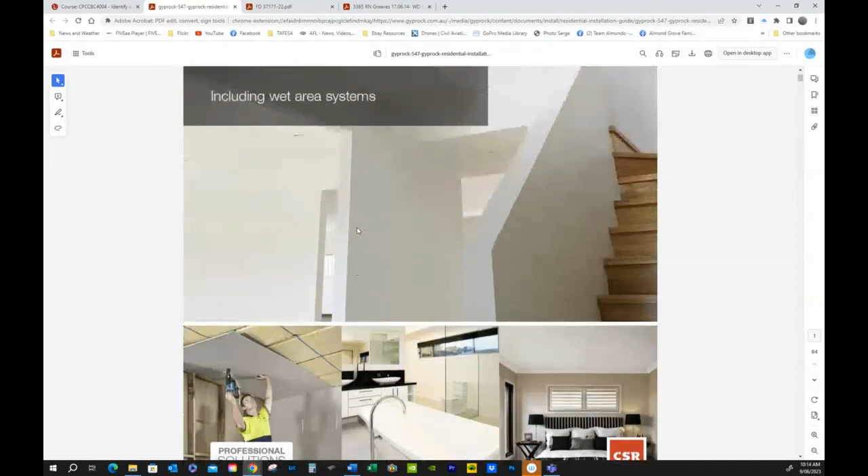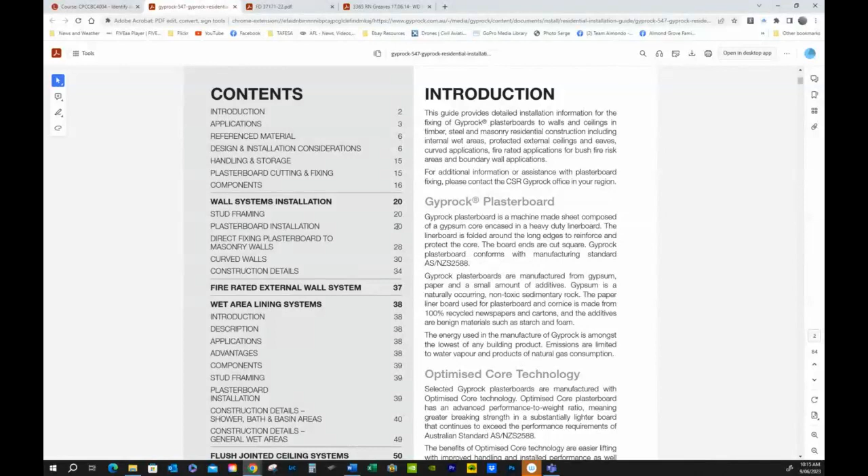of working with plasterboard. Now notice up here, it doesn't join on a sheet. It actually goes past, and then they have to back block that. And these are just lovely pictures about plasterboard. And like anything, you've got your index through here, stud framing, plasterboard installation. You've got your applications, reference material, handling and storage, cutting and fixing, components, and the main thing that I am really interested in is shower, bath, basin area, because this is critical to make sure under this wet area lining systems that all of this is actually taken care of. So I'll probably lob into here after I've actually had a look at the plasterboard installation, and I don't know if I can actually get that to link. No, so I'll have to actually go 20 pages.

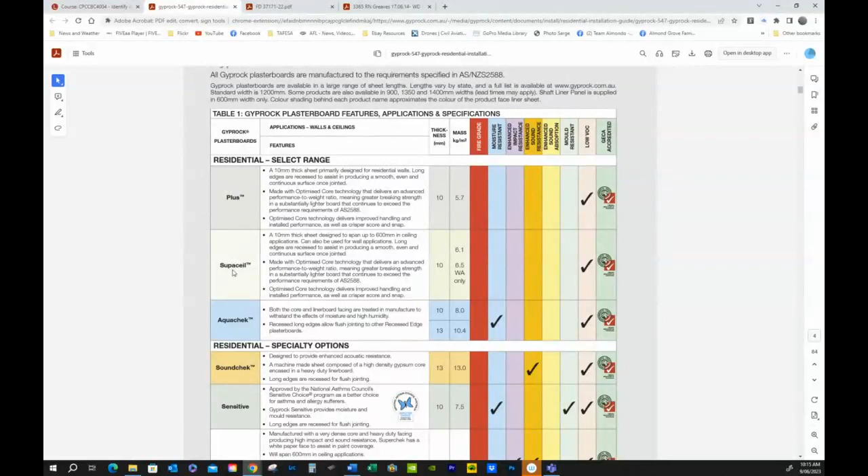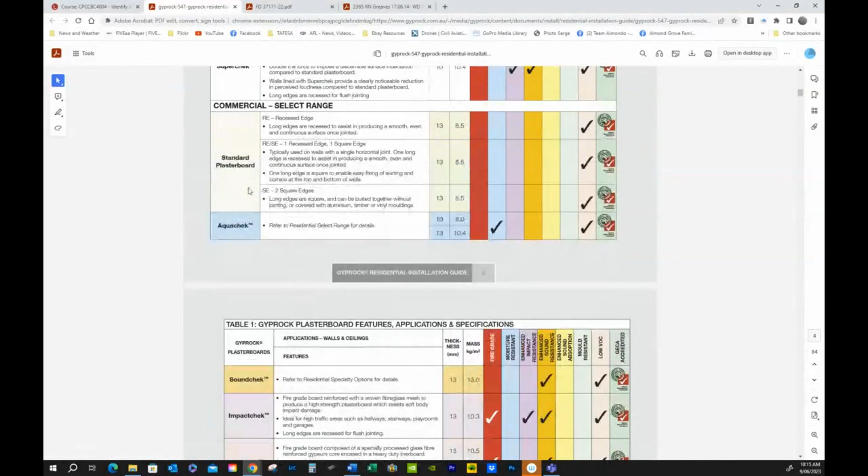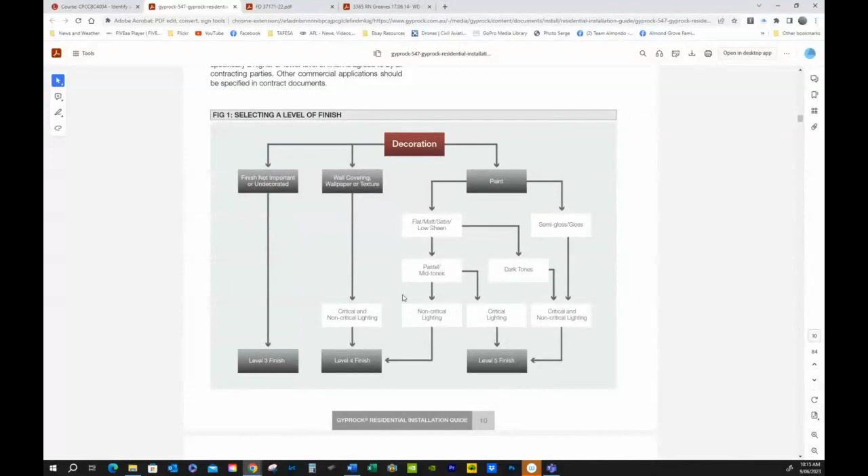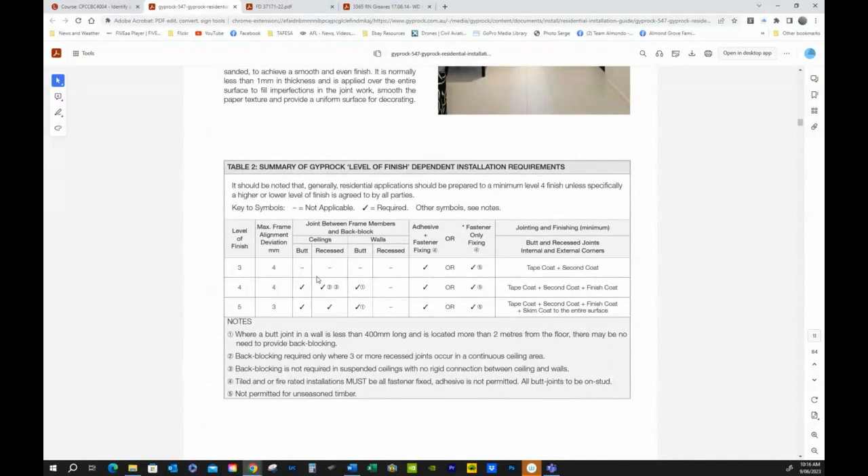Now down here are all the different applications, the different types of Supaceil, which actually has a fiberglass insert in that material to make it not sag. Aquachek is basically wet area board, and you've got Soundchek, standard plasterboard, all the different ones. And so you have access to a wealth of information, and you owe it to yourself, even if you're just doing small projects. Levels of finish, really important. How do we get just a proper finish? And it is crucial. Okay, there's the actual level of finish checklist. And so we keep on going through.

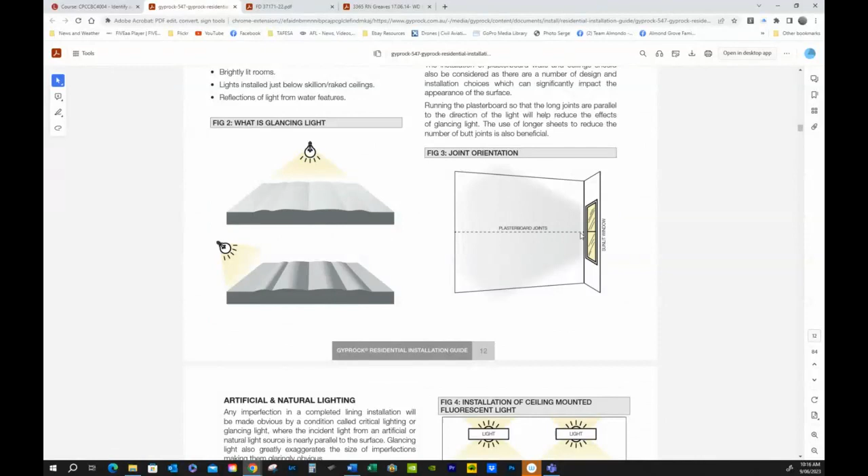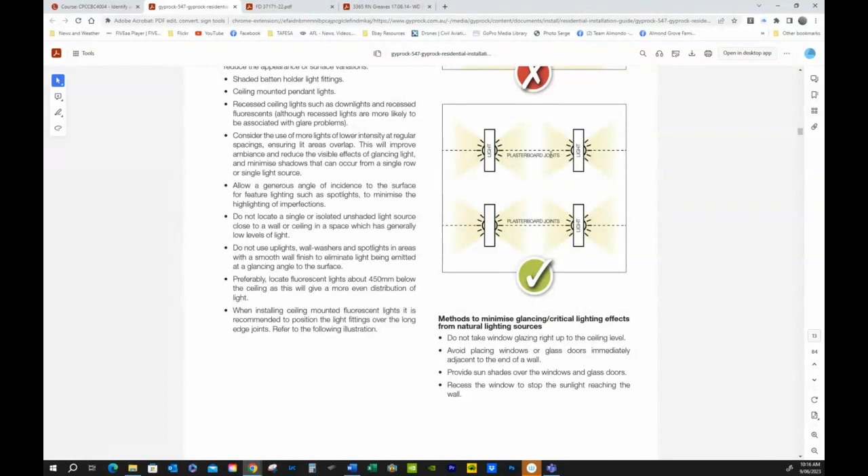This is one of the don'ts of any building. Never put a window right alongside of a wall, because the light will refract along that join and you'll see everything. Same with fluoro lights over the top of a ceiling. You will see every join. So notice this. They actually put it right at this point in the center of the lights, and because the light's so bright, no one sees it. Okay. Same inspection of plasterboard. So this is very real.

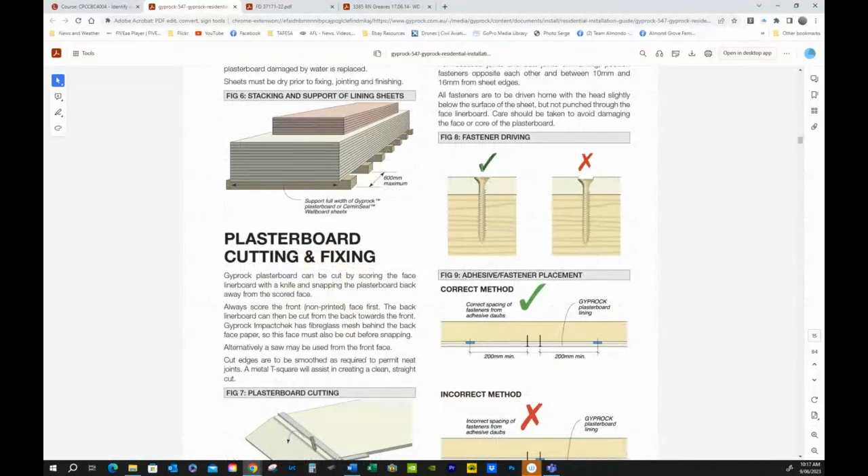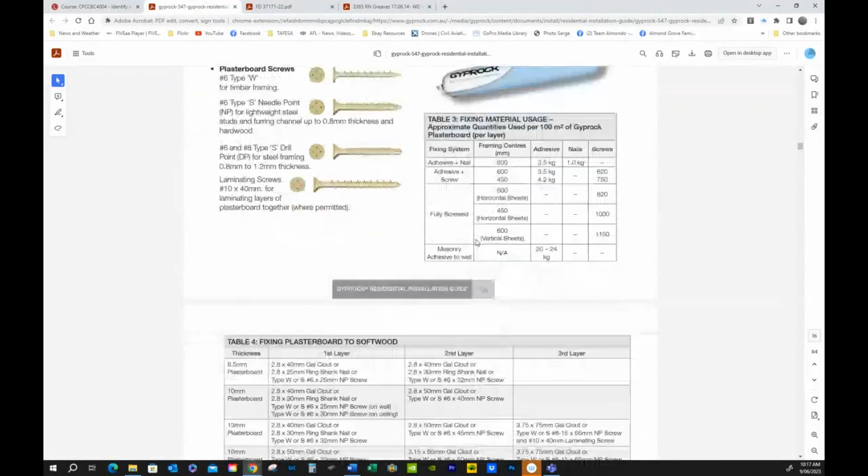All right, correct fastener driving, incorrect. These are all critical. Okay, and this is one of the problems that we actually have when we're working with plasterboard. So these are all the fixings, tells you how many screws. This is all how it's supposed to be fitted, which is really good. And it'd be great if right down the bottom we've got 18.

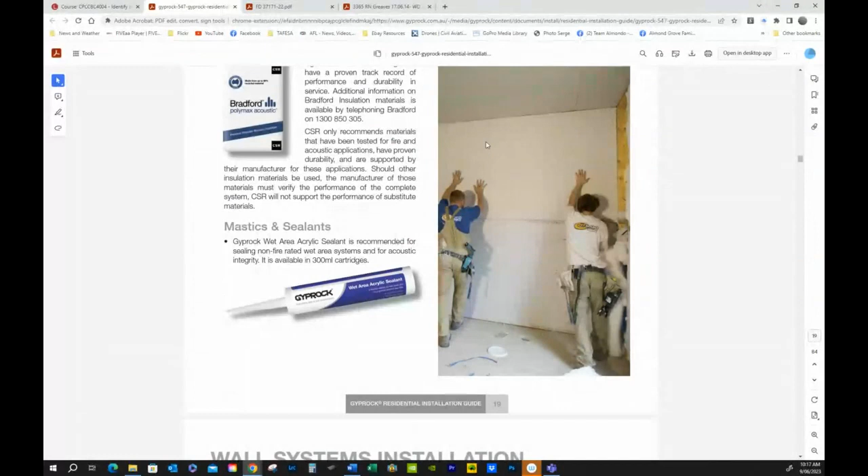Okay. Bradford Gold, we've actually got a site for that we'll be going to. And this is a list of all the products. Far too much, a little bit of a picture of a couple of plasterboard fixers actually putting their plasterboard into position, and basically they've got their screw gun here and off they go. Their hammers are not like carpenter's hammers. They actually even have like a little axe on the end, so if they have to chop out a bit of plasterboard to fit something, they will.

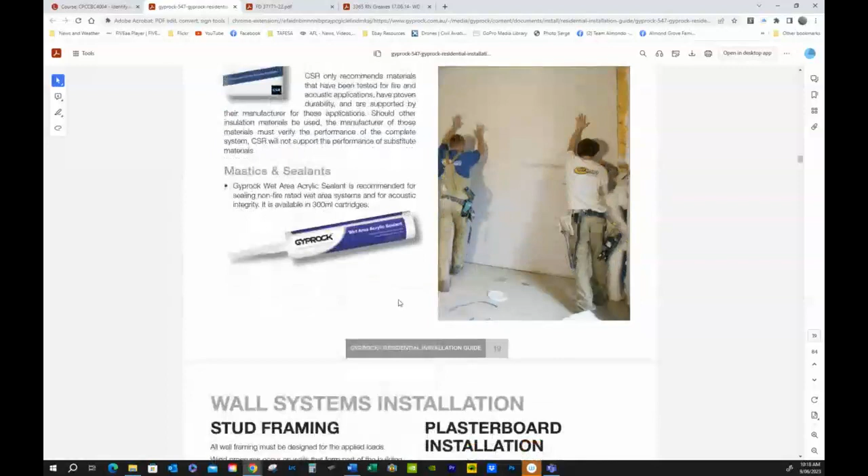So stud framing, and this is a bit that you've already seen in another video, but this is crucial. Okay, usually plasterboard is fitted across the joists, and imagine studs behind that vertical across the studs. Okay, now if you're looking at demountable partitioning, it's the opposite. They often do things vertically. This is with steel stud, and you'll notice that there's never a join here,

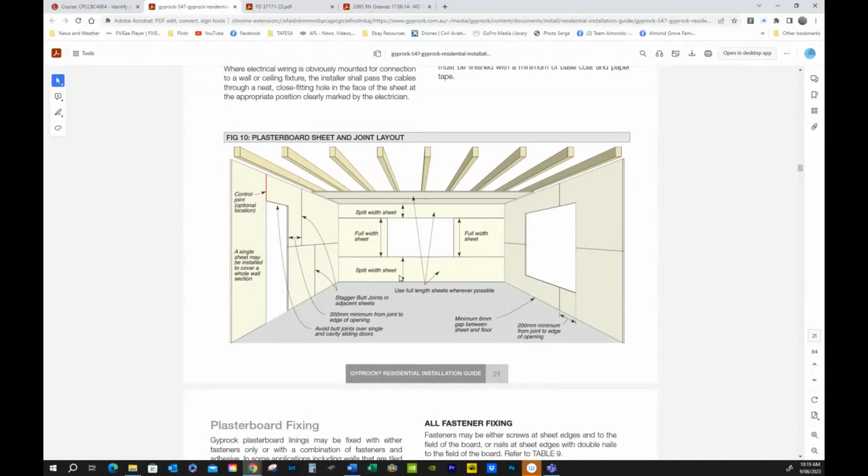or if there is, it's as ugly as anything. Generally on a transportable, you might have that, because the simple fact is they chuck a whole house on top of a semi and flog off down the road at 50, 60 k's an hour, and the road, there's movement and everything like that. Chances are you might get a split here. But these are the keys that we actually need to look at, and you can see through just some details of all the different types of plasterboard.

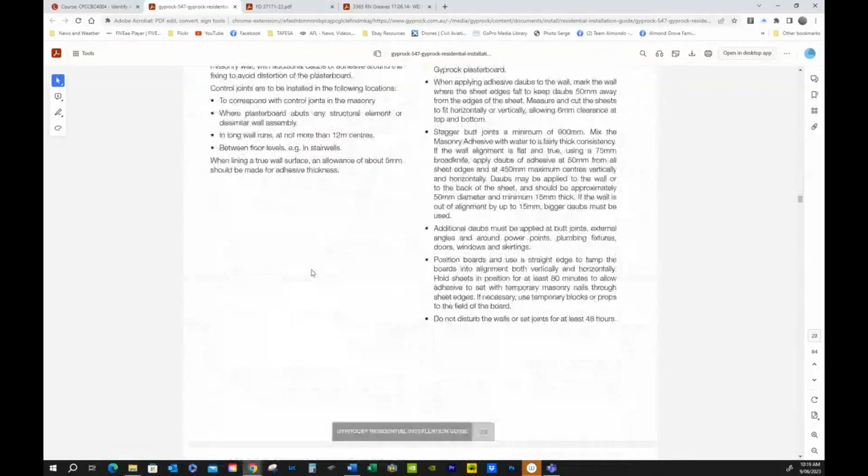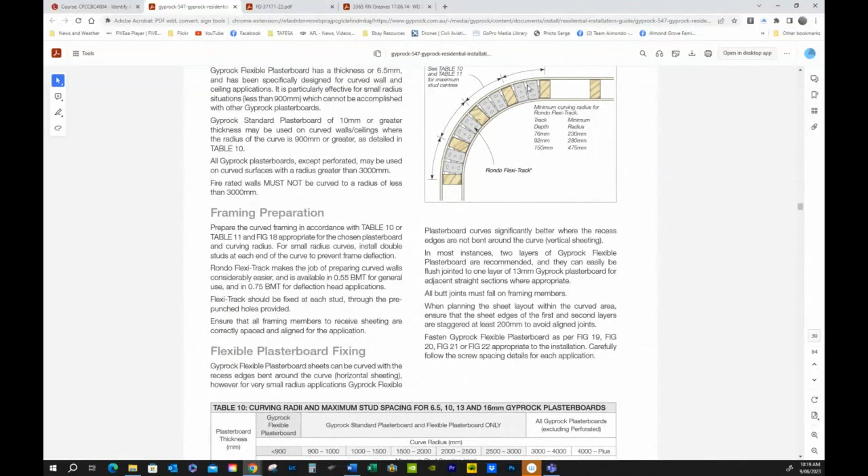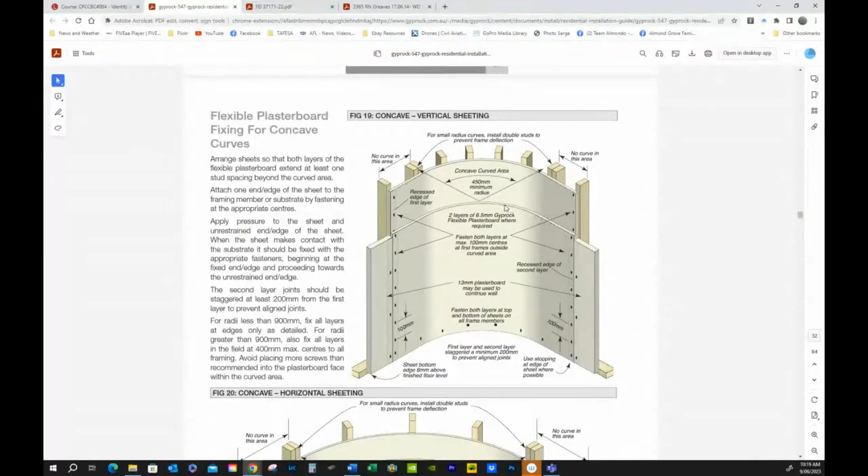Now I'm just going to scroll down because I haven't got the index working. Direct stick, which is interesting. Curved, all right, says that the depth, and this is really difficult to do and to do well. All right, lovely curved stair, and plasterboards following that curve. Notice you're actually using 6.5 mil plasterboard so that it actually curves. And so you have to do two layers, and both of them are glued together, holding them on so that you've got movement like so.

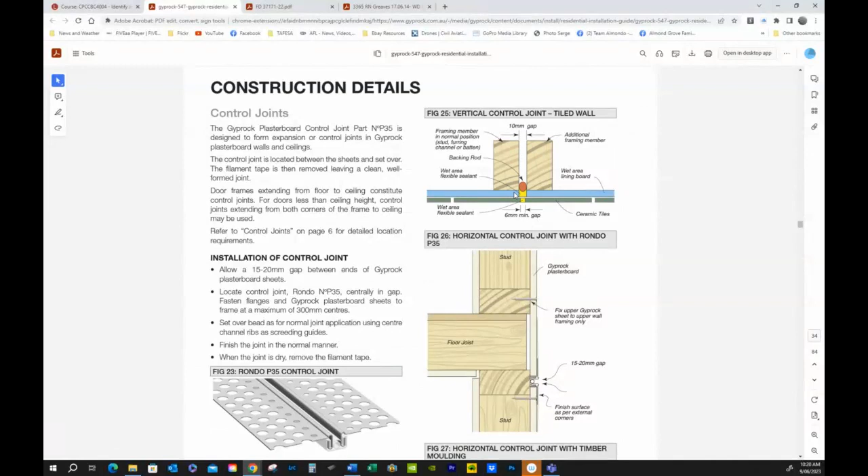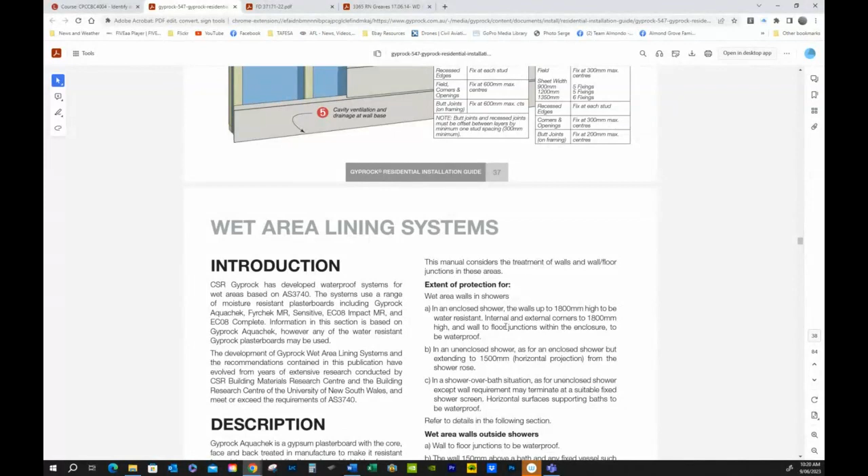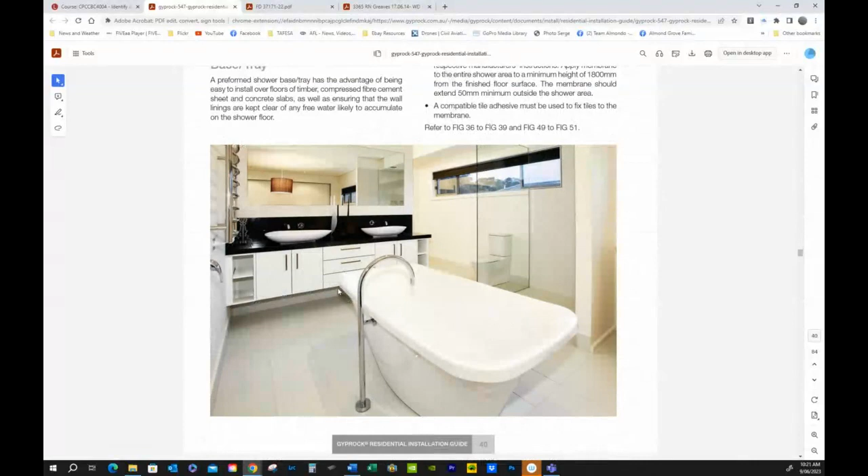Fire rating. And then finally we get to wet area lining systems. So wet area walls in showers. Okay, and in an enclosed shower, the walls up to 1800 mil high to be water resistant. So that means they need to actually be tanked. And we'll have a look at some lovely pictures of all the different types of tanking. Now, can you understand why I made the statement that your wet area bathroom ensuite is the most expensive room in the house? You've got glass, you've got toilets, you've got baths. It is just really, really something that is quite expensive.

So let's first of all have a look at a preformed shower base, figure 36. Okay, so this is a second story structure. You've got floor joists, you've got structural sheet flooring, and then on top of that, you've got a mortar bed, and you actually have a preformed shower base. Now, in our build, we have two of those for both showers. And so have a look at the weatherproofing detail. First of all, we need to have a noggin around here, which is probably approximately 150 mil to the center. See that there, right? Floor level.

And fixing here. And then you've got a 6 mil flexible sealant between the shower base and the tile, and also between the plasterboard or the wet area board, okay, Gyprock Aquachek or Villaboard, and that seals and stops any water coming up through here into here and then starting to eat away at timber.

Now, I have seen pictures of a job. It was a housing trust place, and this was not done. And the bottom of the stud for up to about 150 high just ate away over 15, 20 years that the shower was there, and my friend had the job, says fix wall. And so he goes there, and the owner, or the tenant, just pushed on the wall, and basically the whole wall moved because it had eaten away the bottom of the stud and a fair bit of the bottom plate.

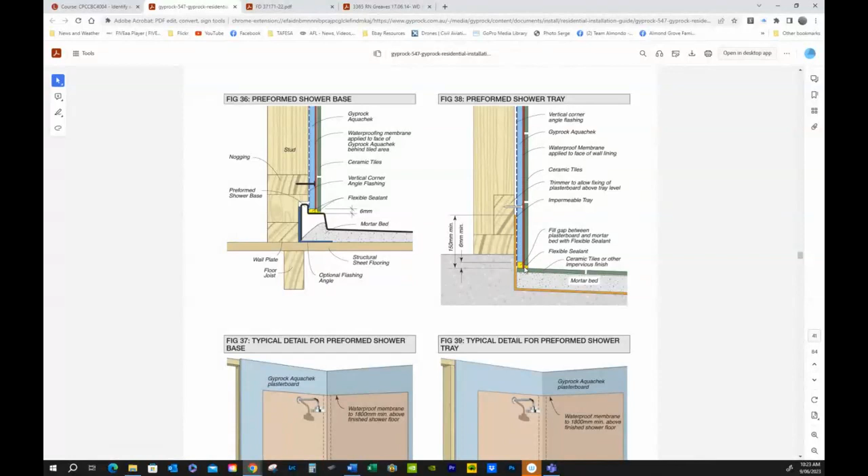The waterproofing goes up here, and in the key area, if you have a home inspection, the inspector will usually use a probe near the shower area and jab it into the floor and carpet. Any water that comes through there will work its way through, and you get a musty smell. So you've got your mortar bed, the same detail, this 6 mil gap, and there's the membrane, right through. That membrane is meant to resist any water coming through.

A couple of details for very basic, ordinary showers: the waterproof membrane is to be 1800 millimeters above the finished shower floor. So that means after the tiles are put in, 1800 above that, and it goes straight through, past the actual hob.

This is what's called a hob, and it's meant to encapsulate all of the water. So you can imagine if this drain blocks and you get 100 mil of water in here, it will finally spill over. Or you've got a preformed shower base.

Nowadays we use a drain system that has a double layer underneath, so any water that gets onto the floor actually comes in. It's called a puddle flange, and that's worth having a look at also.

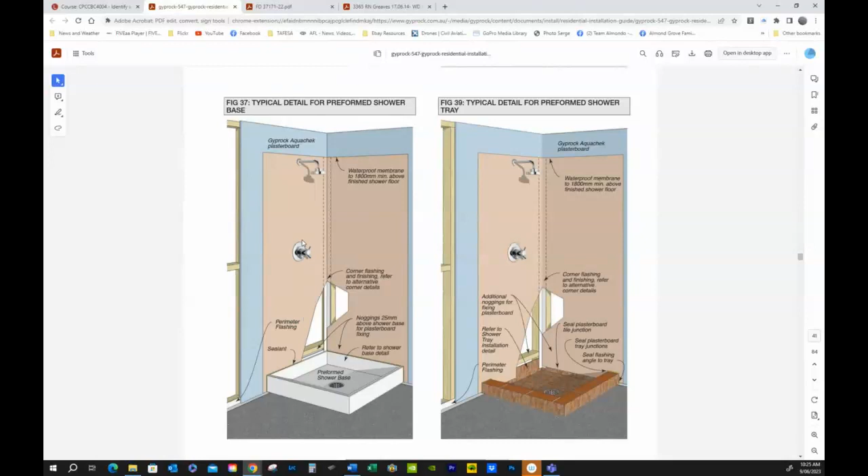Let's have a look. Here's our mortar bed, here's our flexible sealant, and somewhere along here there should be an arrow pointing to this bond breaker. It's a little bit designed to take the pressure off of the material.

Here's another one. So there's the tanking, and over here you've got this key area that covers each one: a class 3 membrane applied to the face of the wall lining and the floor, and it goes all the way through there.

The idea is every time someone gets into a shower, especially on a timber floor, there will be some movement. In my lifetime I've seen a couple of products, grip core, which was a waterproofing brand, I've seen fiberglass, I've seen PVC, what's called tanking, basically like Coke bottle plastic reformed into 100 by 50 that we used to glue down. Doesn't work. So there are lots of failures in wet areas.

I did have a document and a set of these, 15 or 16 of them, and used to teach the carpenters about them, because they're the guys who actually put a lot of this prefab work in before the plasterboard's finished.

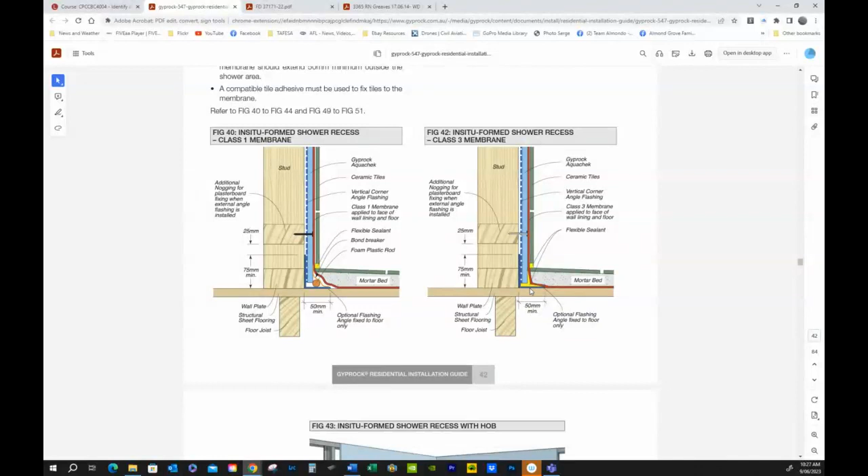A little bit more waterproofing, and you can see they've tanked over the top of the hob, and then you've got your puddle flange in here, and it says optional continuation of perimeter flashing. You'd have to be a nut not to do it.

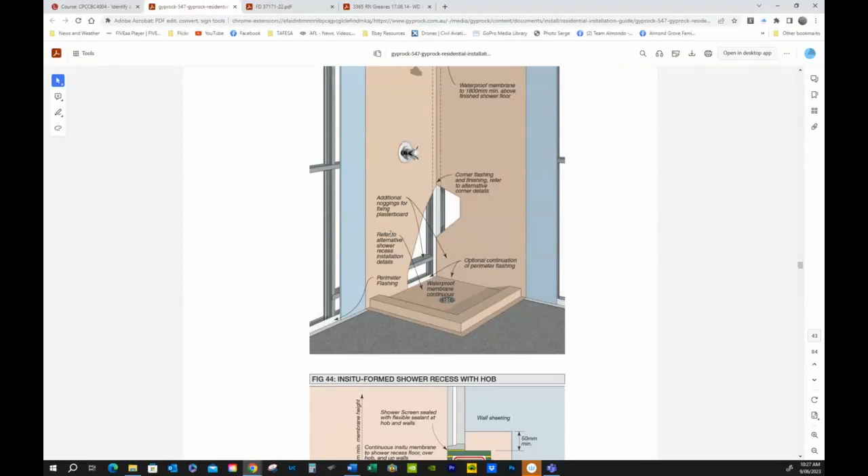In the corner, you also have a flashing that goes in here. It screws to both sides and is designed to take any of the movement. And here we can see additional noggings for fixing.

Here's a closer detail of a hob, with the expectation that this should be 50 mil up and over, and then you tile over the top of that. If you do that correctly, you'll be well on the way.

A couple more details through here, for the bath area. There's a rule that the membrane should be 1500 projected from the shower rose. So from here you measure 1500 and do an arc. The Bang 'em Up Building Company, who never do any more than they absolutely have to, do this.

The professional builders, such as my brother-in-law, do the whole floor of every wet area, because it's just dumb doing the bare minimum. There are some people in life you meet, and that's exactly what their characters are, bare minimum. They will only do just enough.

And I get it, a builder has to build a house for the most cost effective price that he possibly can, and the profit he makes is his living. But the other factor is they've got to cover it for 10 years, so if they had a leak out here, it's going to go straight in, and that's a big problem.

So you can see the radius there, which means this has to go really longer, 1500 might be an 1800 long bath, I suppose. And then you can see we used to make little stud walls underneath here, but nowadays they actually use aerated foam, Hebel, as a means of fitting that in, and it's waterproof and a lot better job.

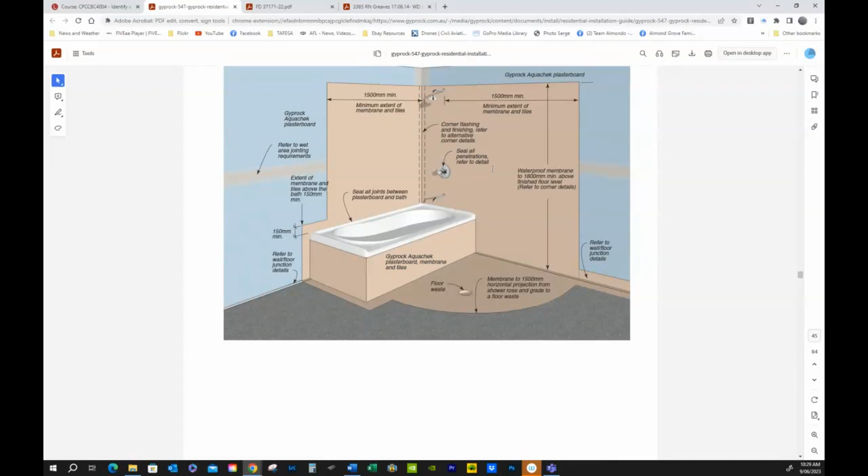So notice that this is all worked out so that it's actually covered. Shower screen, same detail. I always show the students this lovely detail here and this detail here, and then I ask them, has anyone seen a bathroom that actually has this detail? Not one. In 16 years, probably 14 of those I was actually teaching all this stuff, and never once did anyone say to me, oh yeah, I see that all the time. No, it looks crap, and so no builder is going to want to do that. Now they might do something like that, but even that I'm yet to see. Generally the two tiles touch.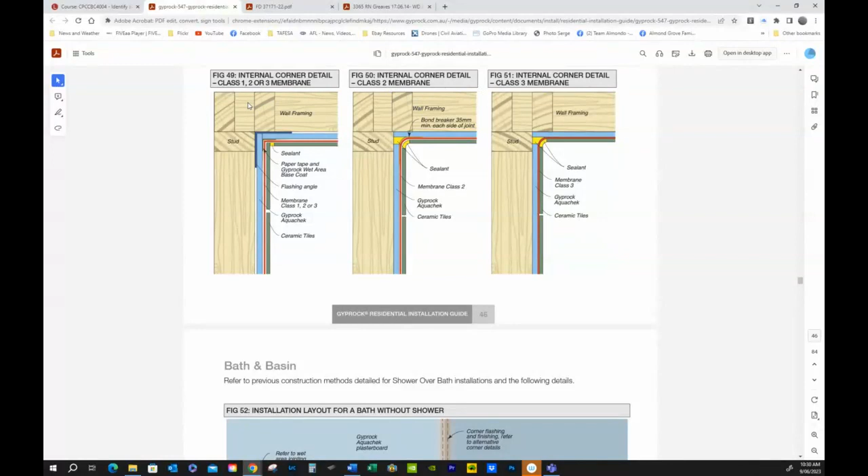So I get it, Class 3, Class 2, and then this one says Class 1, 2, or 3. Installation layout for a bath without a shower, so it covers every other section. The reason I'm showing you this: the maximum amount that you can cut out of a timber stud is 20 mil, and the only place that you can do 20 mil is here. The reason for that is so that the lip of the bath is behind the line of the cladding, and the cladding comes down to within 6 mil of the top of the bath, and then that is jointed. The idea is that actually locks away any opportunity of getting water ingress into the stud work, as I explained earlier.

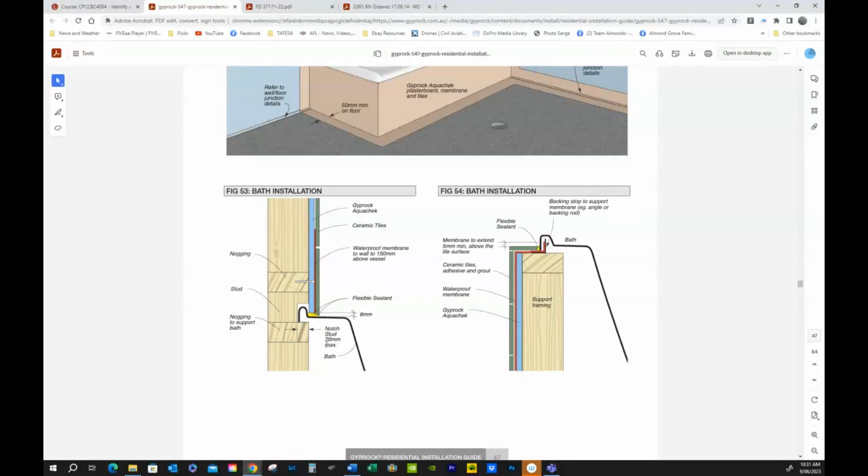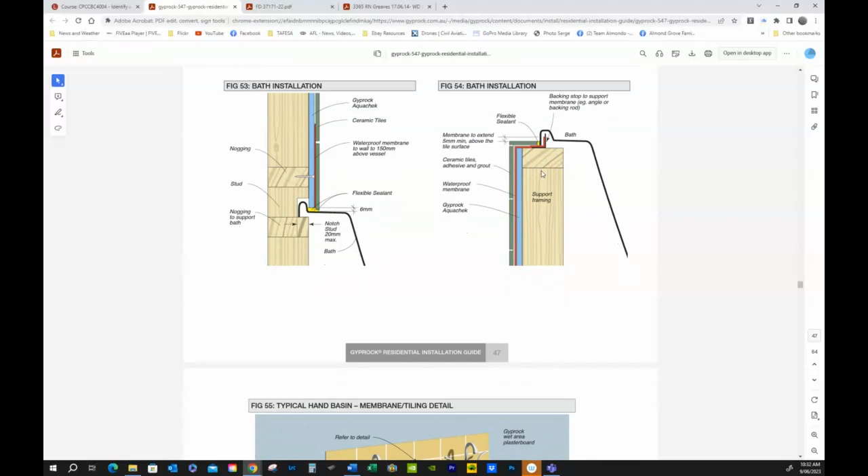So you can imagine that when you see that, you'll see these lips here, and you'll notice that this lip and this lip is actually much less than this one over here. When we actually have a bath sitting on top, this is a painful detail. More often than not, you hop in the bath and it'll make funny little noises, and that's simply to do with the weight of the bath. Now, underneath the bath used to be generally cement, but nowadays they use Hilti foam, which is a glue, and it holds the bath pretty well solid.

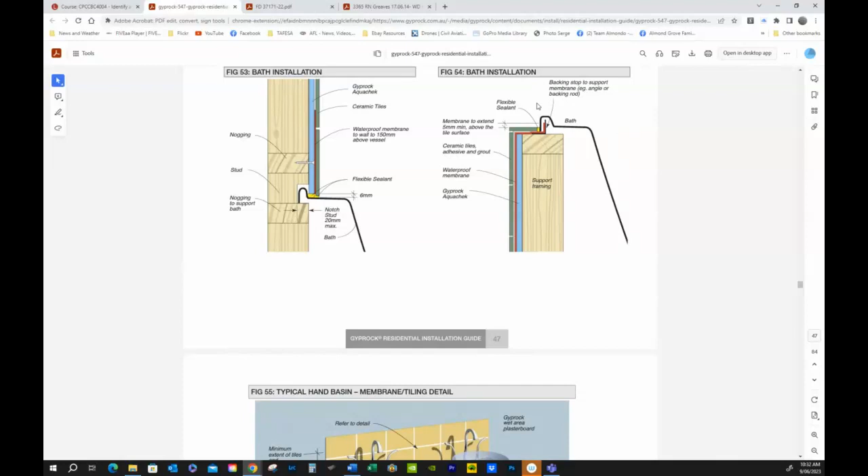So again, same detail: Aquachek, flexible sealant. Now if we just had a tile up here, every time the kids jump in the bath water goes everywhere, and then it goes straight into this support framing.

Detail for a basin. Now this is one that catches out, and in particular that housing trust home I spoke about earlier - the first question that people need to ask is, where did the water come from? Two places, both taps. They had a rose over the top of here, but it was not sealed through here, and this is critical that this is actually sealed. In this case you could see the stains all the way down the stud work that my friend Stuart had to fix that job up.

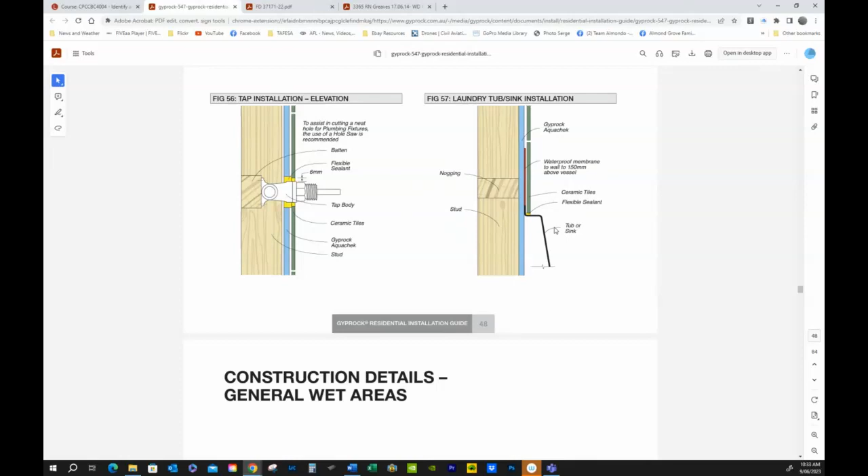All right, same detail here. You've got a flexible sealant, and again it's just key areas.

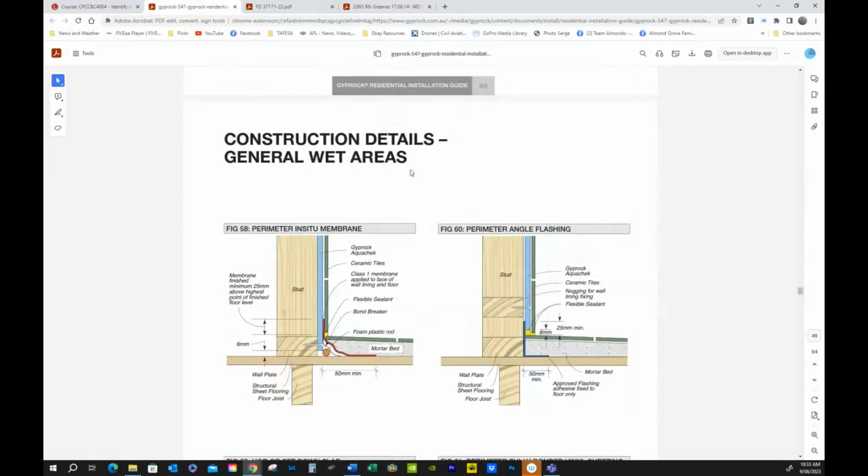Construction details, general wet areas. Perimeter in situ membrane, you can see it there, angle flashing. It almost looks like they're redoing that, but that is the area I wanted to actually show you. If you were doing a home or a nursing home, you'll notice that all of the floors actually have a cove like that, because of the amount of washing and gear like that. It's also just to keep stuff away from there.

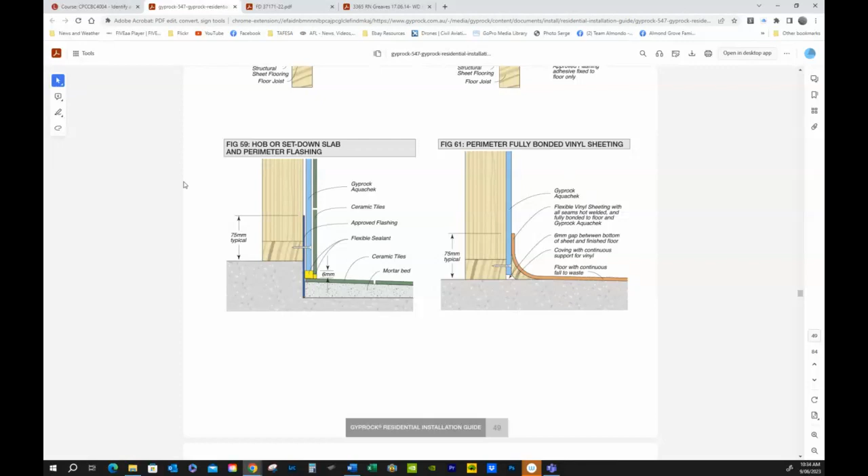I made the comment in class that I find it hard to believe that they would use something like a piece of timber there, because if you did have a leak, this would actually rot out fairly quickly. But it does say coving for a continuous support for the vinyl. Now there's no doubt that the vinyl is waterproof, and so that in itself is quite important.

Now the rest of the stuff down here, I'll leave for you to have a look at regards to cornice. This is the cove that we are using in our home, so it's a 90 mil cove, and this is how it actually sits on a wall.

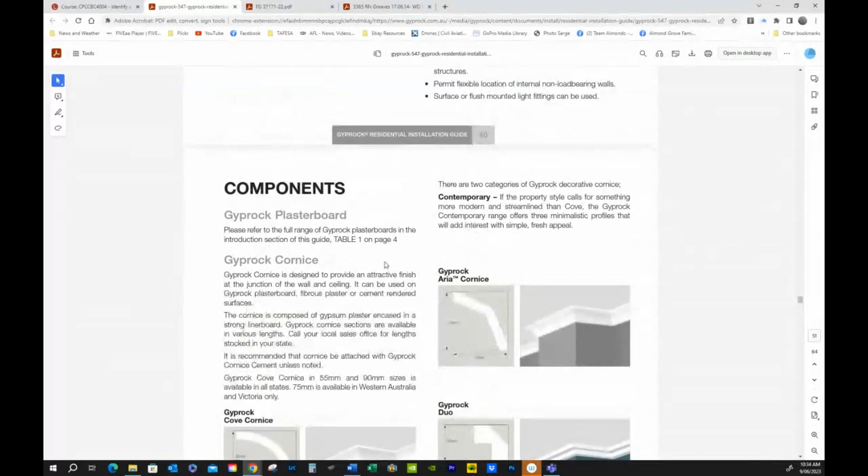All right, I want to actually go back to the course, and that is a key area through there. So please actually download this and have a look at the waterproofing, because when I did the lockup video for plasterboard, I did not spend a whole heap of time on the waterproofing, so I thought that would be a better way to do that.

Now there's two other resources that you have here, and the first one is a resource for insulation, and I'm just - no, it's not that. So let's open that up.

Okay, and it takes you straight to Bradford. How fantastic is this that we can just click a link and it'll take you straight through - why insulate, home insulation, commercial, technical service, downloads. There's a heap of stuff you can download, and information around claims, like insulation can reduce energy use for heating and cooling by up to 20%.

This morning we'd had a massive amount of rain and had a fire last night. I have a thermometer on one wall and check it every morning. This morning it was 12 degrees outside according to my computer, and 18 degrees on the actual thermometer inside - 6 degrees warmer inside than outside.

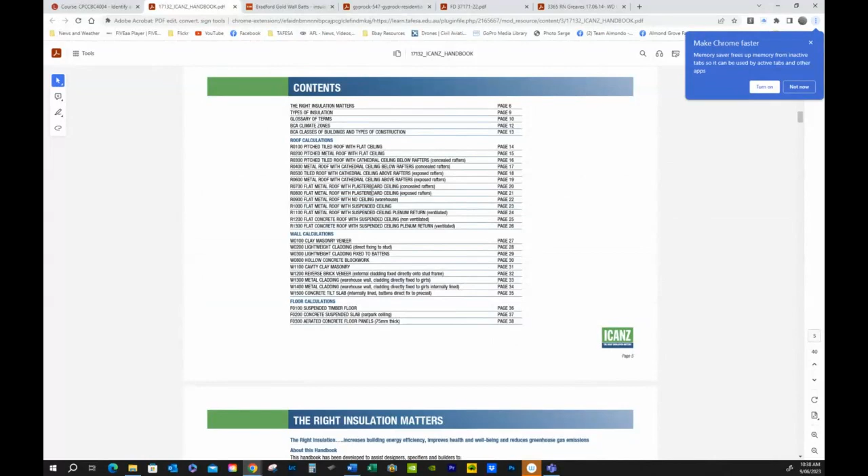Flat ceiling, metal roof with no ceiling, plasterboard ceiling, concealed rafters, exposed rafters - you can go through and there's all the reasoning. For example, this is what I put underneath our floor, and the difference was absolutely gobsmacking amazing. In summer we used to have the evaporative air conditioner going by about 9 o'clock in the morning. The moment we put this reflective board, which is polystyrene with 2 layers of actual insulation on there, we don't put the air conditioner on till 3 or 4 o'clock in the afternoon.

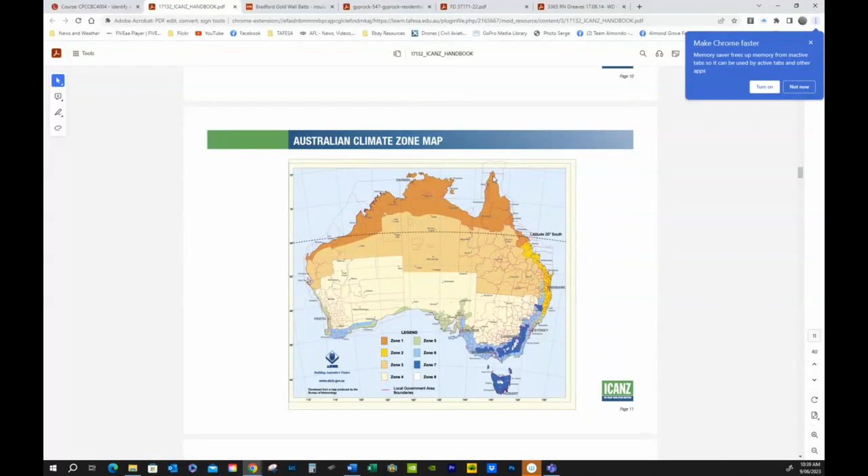Glossary of terms, Australia's climate map - you can see we're zone 5 in Adelaide, and you can look at the rest of the country. Zone 1, super duper up here - we were up there last year for 3 months, and man, oh man, was that hot.

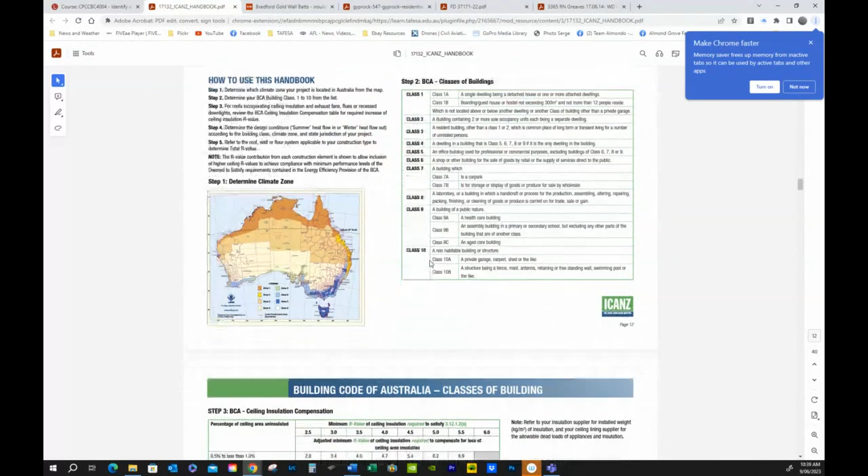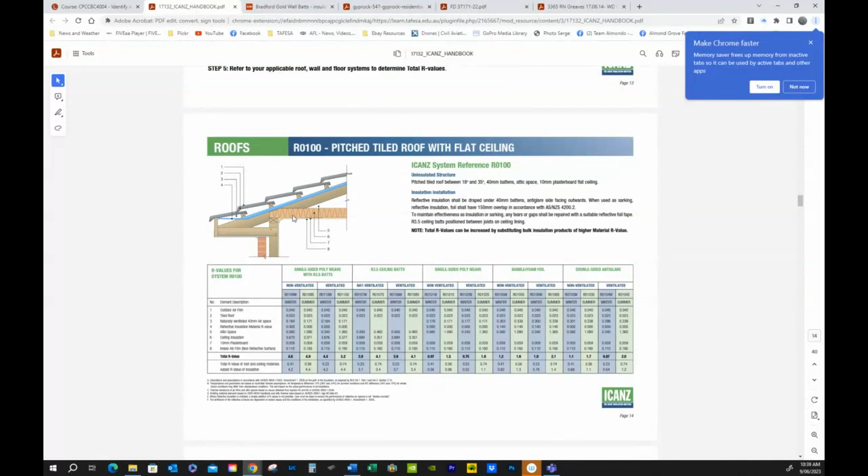The BCA classes for buildings in reference to these - you can see, for example, pitched tiled roof with a flat ceiling, where we should be using insulation and the recommended size. Now that's gold. If you can get that, this is another valuable resource you can put into your digital library.

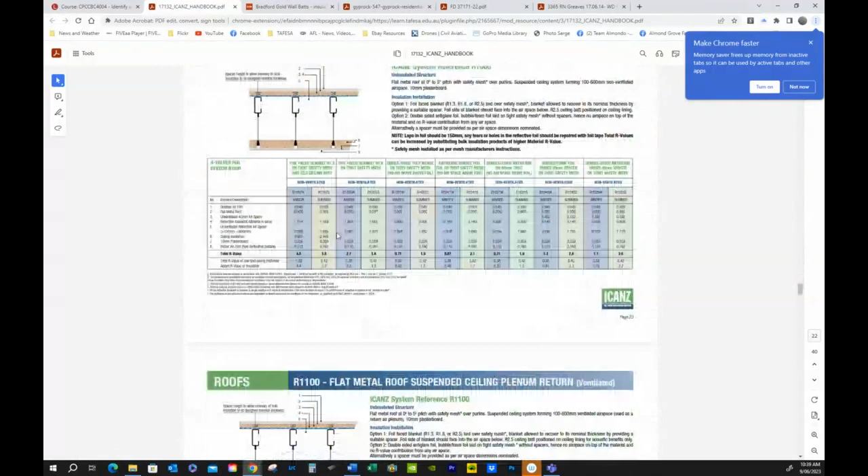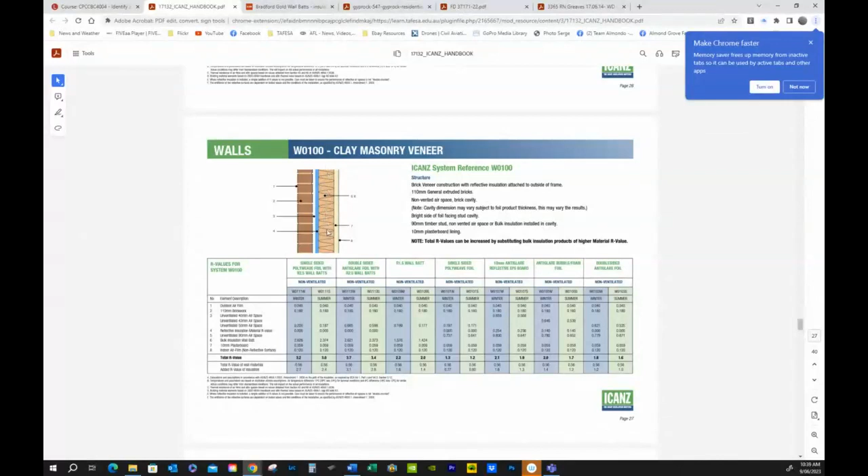Flat metal roof without ceilings, ceiling hangers, underneath a concrete slab - there's just a myriad, clay masonry brick veneer, masonry veneer, isn't that interesting, right? So we've got all of that information for you.

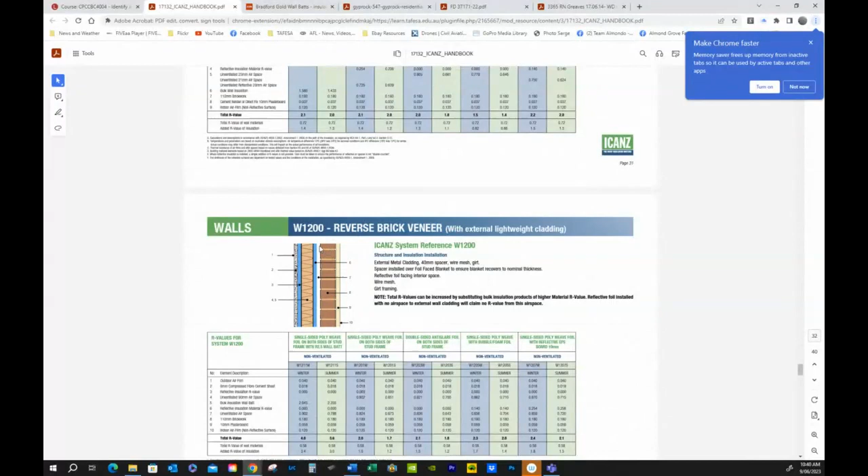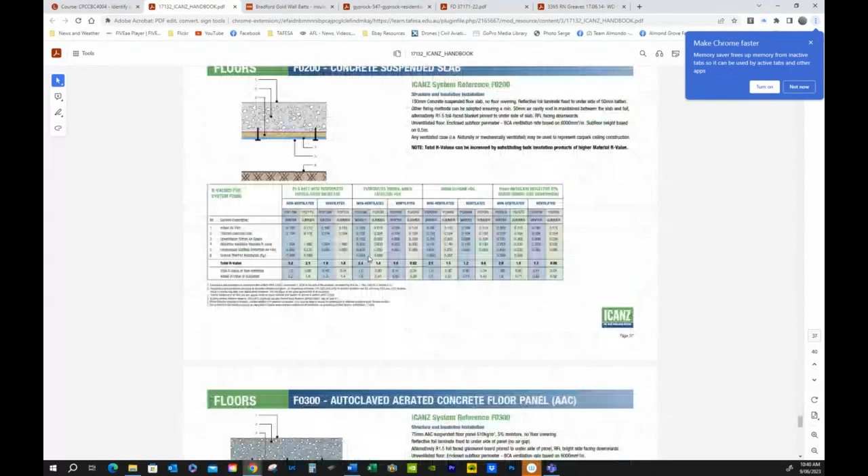As builders, you need to be up to date with what's actually running around, and you could no doubt do a search to see if there's an update on this publication. But I can see straight away some key areas that would be really handy in regards to using this document. All right, so let's go back here.

All right, so that's all I have in regards to waterproofing. What I can tell you is that it's one of the most frustrating areas in a builder's life, and we came up with different situations to handle it.

We used to waterproof with a product called Selleys, which is a polymer sealant, and we'd put that underneath the windows. Once you set those windows, especially ones facing the sea, no water would get through whatsoever - Selleys blockade. The other thing we found out quite accidentally down the track is it cleans off with terps - you get some mineral terps, and you can brush it into a corner for a perfect seal.

We used that for years, and used to carry around a box of those, because any area that was potentially going to leak, that's what you need to use. Silicon is good in some applications, but in others, especially with a paint finish, you don't want to put silicon on there because the paint won't adhere. But with Selleys blockade, you could brush that into a corner, paint it, and basically get very few water leaks. So I'm happy to recommend that product, and no doubt there are more and more products available all the time.